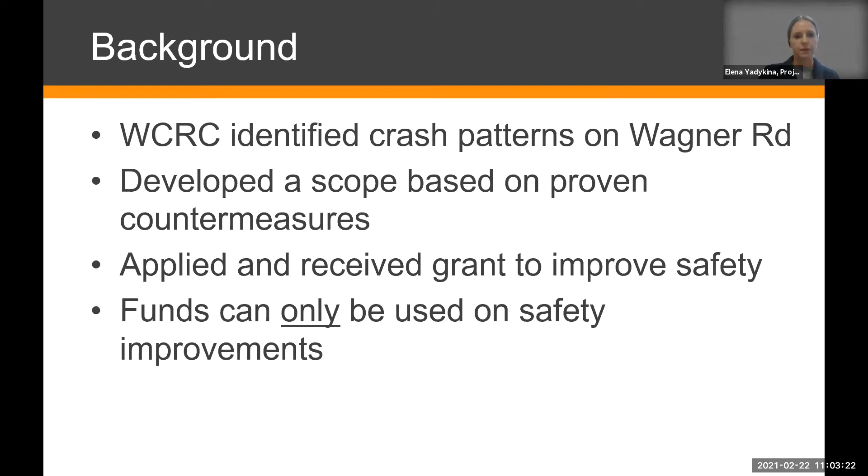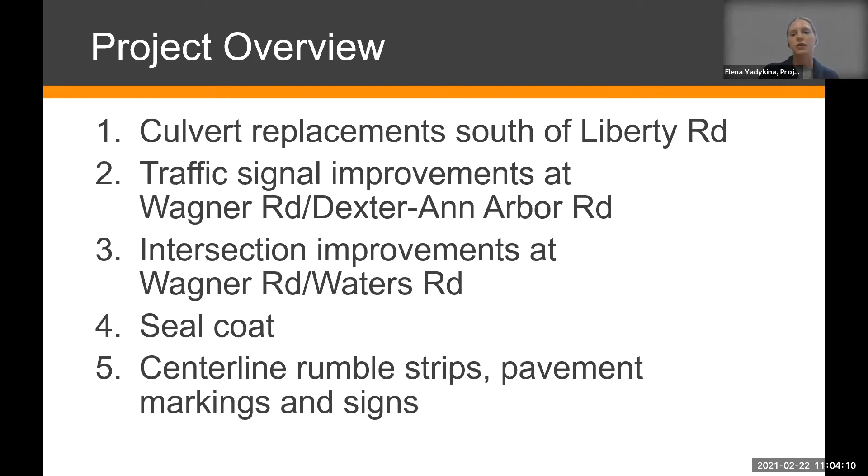We'll talk about the features we included in detail, but the project includes culvert replacements south of Liberty Road, and we listed them based on the timeline, how this will occur, how the project will progress. Then we will improve the traffic signal at the Wagner Road and Dexter Ann Arbor intersection. Then we will work at the intersection of Waters Road at Wagner Road. Then there will be some seal coat improvements and work on this corridor, and we will finish with centerline rumble strips, pavement markings, and signs upgrades along the whole corridor.

And here's the culvert replacements, I think Aaron will talk about that. Thank you, Elena. Again, as Emily indicated at the beginning of the meeting, my name is Aaron Berkholz. I'm a senior project manager here at the Road Commission, and I'll be working with Elena and with our contractor, Fonson, on this project. I'm going to cover the culvert replacement portion, that scope part of this project.

It includes the replacement of 2 crossroad culverts. Both of the existing culverts were identified for replacement based on their condition, and this was a convenient time to replace these, and it provided a financial basis, a funding source for us to replace these 2 culverts. One culvert is located north of, and I'll use the term, the Big Red Barn.

Several of you, as you travel Wagner Road north of Scio Church Road, might be familiar with that. If you're northbound on Wagner Road and go down the hill from the big red barn, that's the first culvert location, the first replacement. The second one is further north, closer to the Cadillac asphalt plant, just south of the southernmost gate into Cadillac's facility.

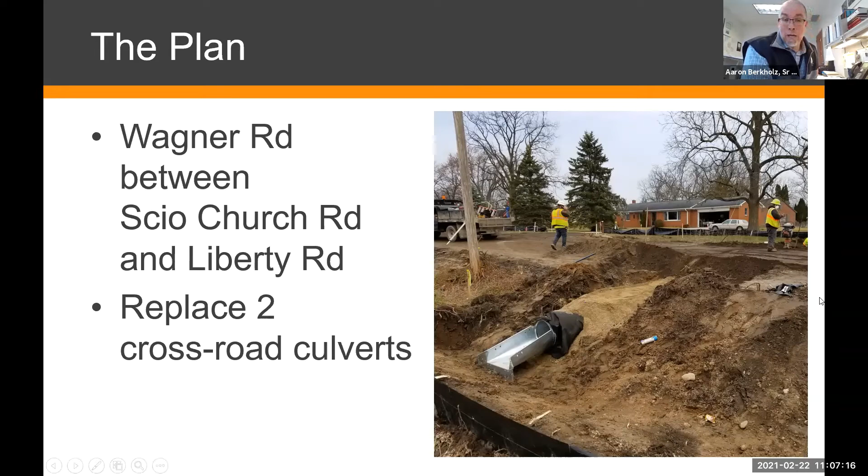The two culvert replacements aren't particularly deep - the existing culverts are approximately 5 feet down from the road surface. Those two culverts will be removed and replaced. The safest and most efficient way to do that is to close the road. Both culvert locations are between Scio Church Road to the south and Liberty Road to the north.

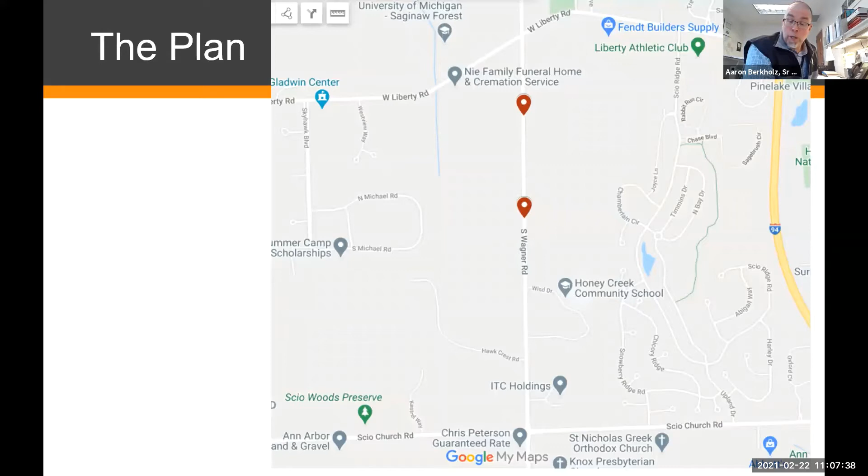In order for us to do this work safely and efficiently, we've empowered Fonson to close the road. The closure is expected to start in June, based on the most recent schedule the contractor has provided us. They expect it to be a 4-week closure to replace both of the culverts that have been identified.

The closure is intended to protect the health, safety, and welfare of the traveling public and the road workers themselves. Something we struggled with a number of times last season was motorists, bicyclists, and pedestrians disregarding road closures. Whenever we implement a planned road closure, there's significant notice provided to the public. The Road Commission understands the impact on the public and wants to make sure people are informed. We go to great lengths to inform people - putting up electronic changeable message signs ahead of the closure, which will be done on this project, as well as advanced static signage. Unfortunately, despite all those efforts, we still have motorists, pedestrians, and bicyclists disregarding that direction.

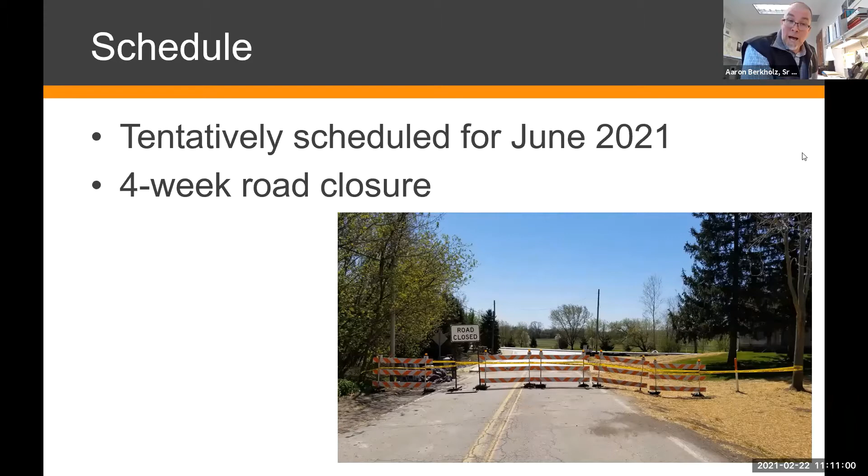What we've done since last season, trying to protect those within the work zones and the traveling public, is put up more barricades. We're trying to well secure the project work zone from those motorists who decide to disregard the signage and barricades. The detour will be signed and posted, following Liberty Road, Zeeb Road, and Scio Church Road. That's a fairly straightforward detour. When we detour traffic off a hard surface, paved road like Wagner Road, we sign a paved detour.

And this is the most straightforward hard surface detour that's available for this closure of Wagner Road.

We are in the process of moving forward with a number of infrastructure investments, road projects for this coming season, and we've been coordinating internally to try to avoid, as much as possible, overlapping these various road projects in the area. Something I find helpful, as a road commission employee, and I think the public can gain from, is looking on the road commission website. Go to wcroads.org, and at the top there's a tab called Road Work and Construction. Hover over that tab and you'll see Current Projects as one of the drop downs. Selecting Current Projects takes you to a very helpful Current Projects roadmap.

You can zoom in and select various road projects that provide information not only on this project, the Wagner Road Safety Project, but also a number of other projects in the area. That includes the reconstruction of the intersection at Zeeb and Liberty, where we intend to build a roundabout, planned for late summer of this year.

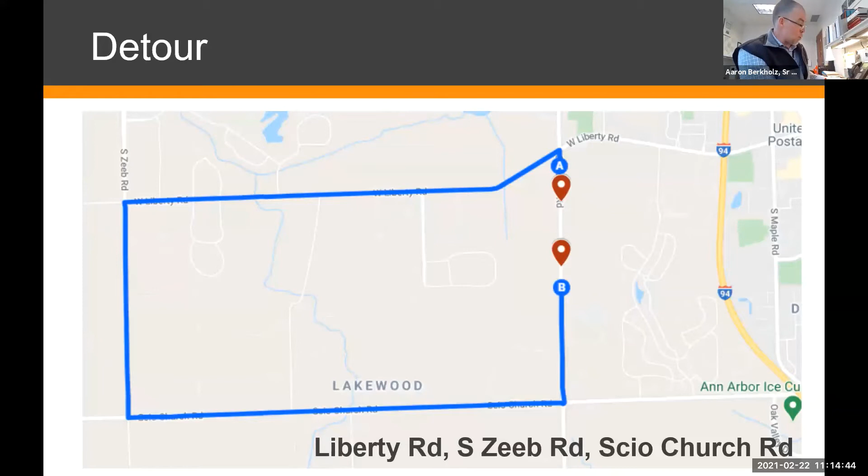And with that being said, I'll go ahead and turn this back over to Elena. She's going to discuss some of the traffic signal investments that we have as part of this project.

Yes, for this safety project, we include upgrades of the existing traffic signal at the Wagner Road and Dexter-Ann Arbor Road intersection. Currently, that traffic signal has a diagonal span with all the traffic signal heads in one span. So the upgrade includes separating out the traffic signal heads for each direction, which is considered a safer setup with better visibility. This is included for this intersection.

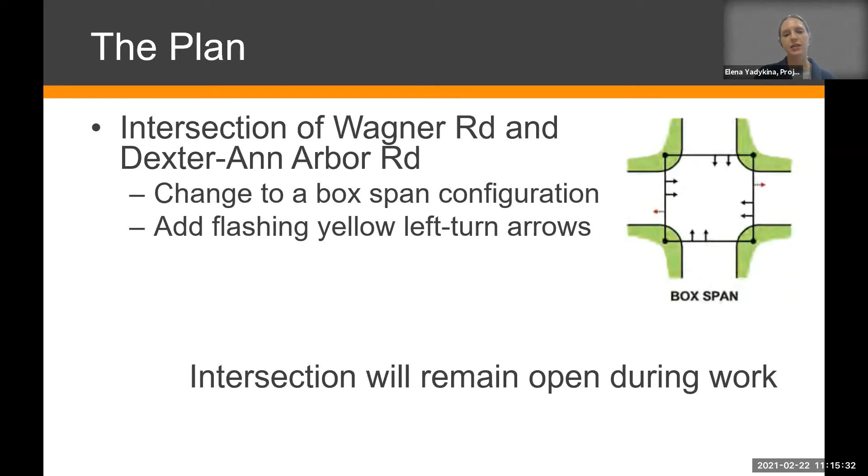It will also include flashing yellow arrows for the left turns on all four legs. This is something you've probably seen in other locations, such as Dexter-Ann Arbor Road at Zeeb Road, where we added that flashing yellow arrow setup. So now you have to wait for a gap, and with the flashing yellow arrow, you can turn if there's a gap, but if there's no gap, you'll wait and get a green arrow to turn safely. This is another feature to improve safety at that intersection.

With the signal upgrade, the intersection will be open. Unfortunately, this time there will be no pedestrian signal, because there are no facilities currently around that intersection to accommodate that. And again, those funds address the signal, and the pavement condition cannot be addressed with this funding. We are just improving safety and addressing the crash history we've seen, because it's a reactive grant.

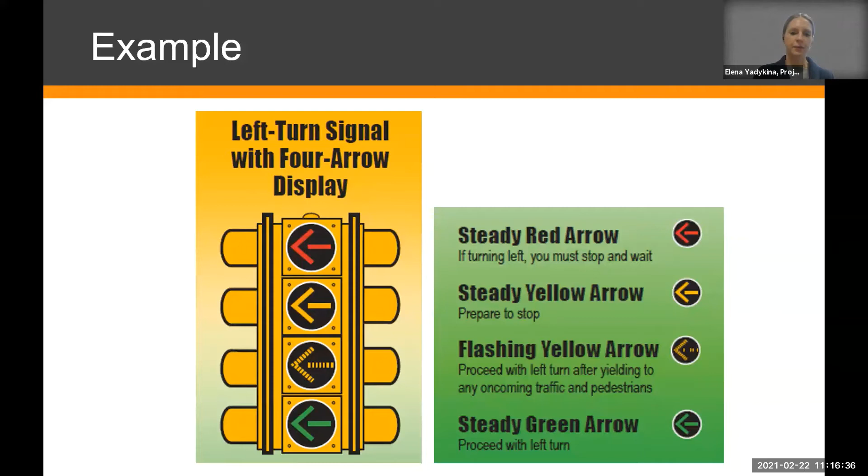Another improvement is at the intersection of Wagner Road and Waters Road. With the high volume and higher speeds at this intersection, the concern was that people turning left off Wagner Road might worry about being rear-ended, since someone might not see them turning. We've seen some drivers taking risks and turning when there wasn't a sufficient gap. To address that, we are going to construct a left turn lane on Wagner Road at Waters, removing those turning vehicles from the through traffic to give them a safe place to wait for a proper gap. We will also install a flashing beacon.

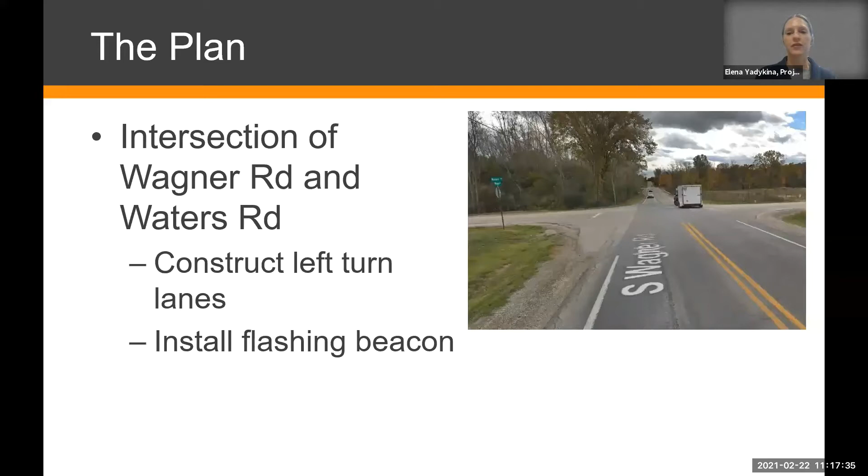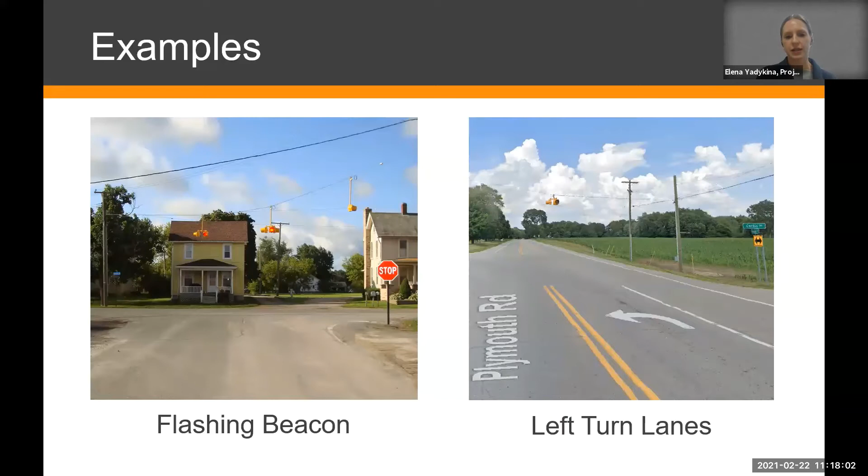We have some examples of these features. The flashing beacon will flash red for Waters Road traffic, as you can see in this picture, because they have a stop sign. It will flash yellow for Wagner Road traffic to warn them that there's a crossing road and there might be traffic entering the intersection. This is an example of the left turn lane as well.

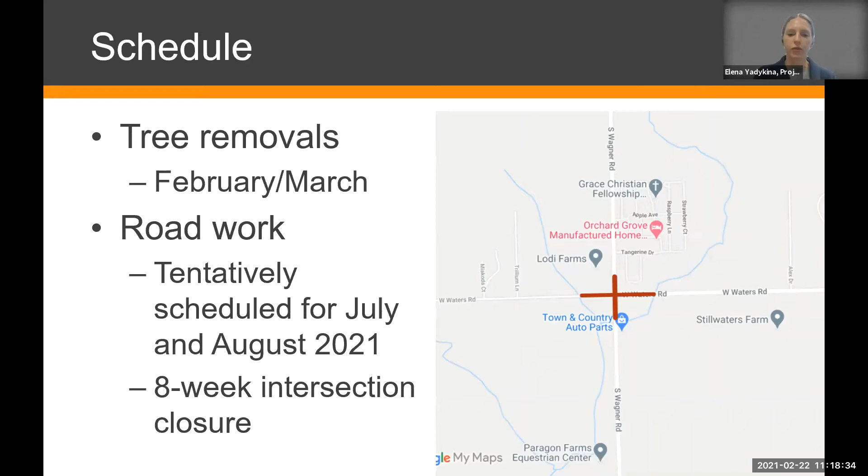For the schedule, tree removals are scheduled to start tomorrow, because of the limitation that trees have to be addressed before the end of March. The construction itself will start in July, and the intersection will be closed for approximately 8 weeks to construct all these features. There will be a detour posted for this work, including Scio Church Road, Oak Valley Drive, Ann Arbor-Saline Road, Ellsworth Road, and Tessmer Road. Hopefully the public will understand and let us construct these features for this intersection.

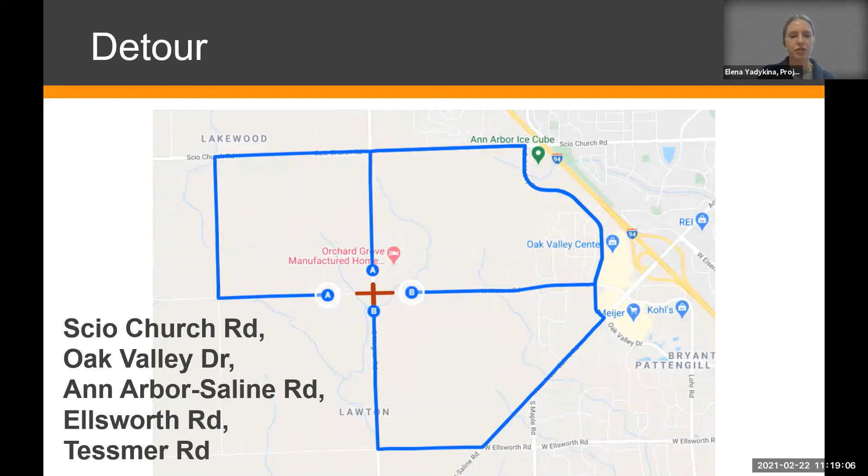I'll talk a little bit about seal coat, another aspect of this overall project. It's not funded as part of the Wagner Road safety improvements, which involves federal funding and bidding through the Michigan Department of Transportation. But as I mentioned, we have a number of infrastructure investments and road projects planned for this upcoming 2021 construction season, including not only projects like Liberty and Zeeb and the Zeeb Road Phase 2 project, but also work to chip seal a number of our county roads, including a significant portion of this segment of Wagner Road.

The extent of that chip seal project is from the Ann Arbor Saline Road intersection north to Liberty Road. We've been working with our operations department staff to discuss the means by which we can accomplish not only the safety improvements on Wagner Road but also that investment in the chip seal. The Road Commission has greatly advanced our investment through the annual chip seal program, and so many thanks to the public for renewing the road millage to allow us to continue that effort to protect and preserve these road investments.

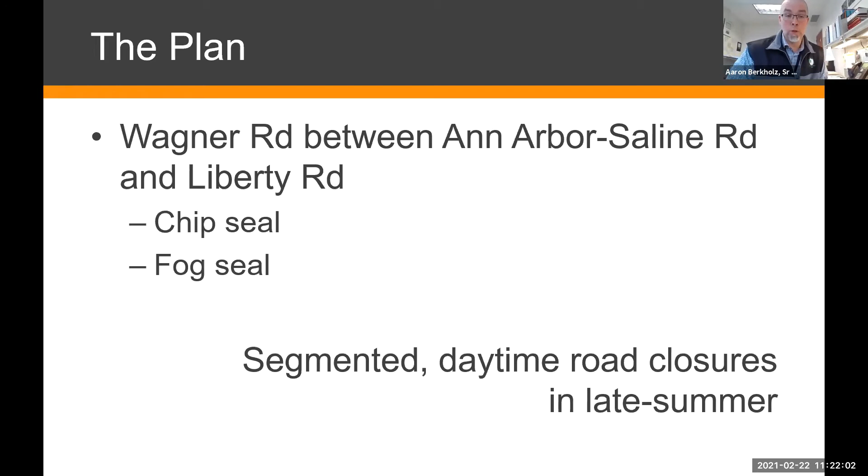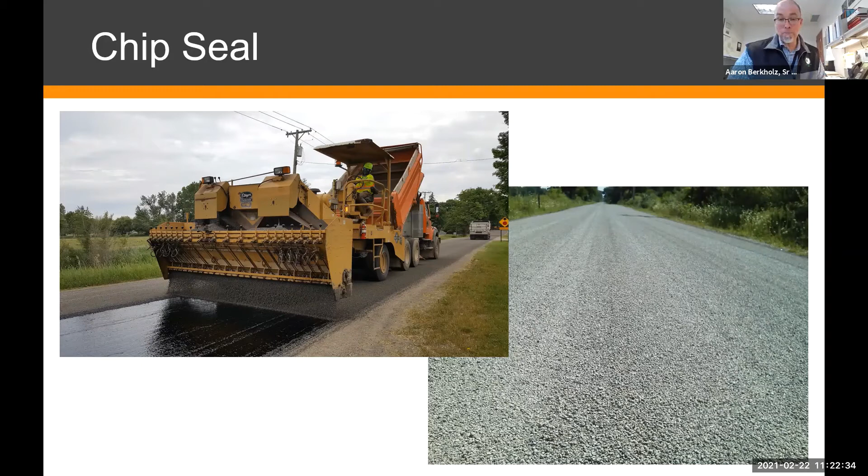We've got a couple of pictures here as examples showing the chip seal and fog seal process. This involves putting down an emulsion, a material that both seals the road surface and provides a material for the chips to adhere to. You can see our operations crew performing that work here. After the chip has been placed, we come back with a fog seal, which serves a couple of purposes: it provides an additional seal to the road, we find better adhesion of the chips that have been placed, and it provides a great surface for us to put down new pavement markings.

That fogged surface being that dark black color really makes those new pavement markings pop. This is a great opportunity for us to enhance the safety of Wagner Road through the MDOT federal aid project that Elena and I have been talking about, but also through this chip seal and fog seal process performed by our operations department.

Just to touch on the schedule related to the Wagner and Waters intersection project, overall we expect Fonson to begin the work this week with the tree removals at Wagner and Waters. We target those trees for removal before the end of March in order to be conscious of migratory bats that may be in the area.

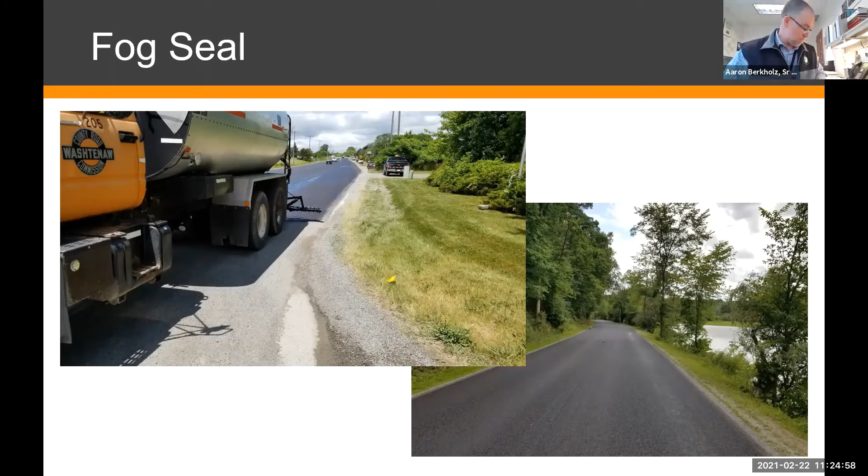Elena will go ahead and touch on some of the miscellaneous work to wrap up today's presentation. Yes, thank you, Aaron.

After these major items of work are completed, we will also be doing center line rumble strips or stripe corrugations. These are to prevent or warn drivers when they are crossing the center line, addressing the pattern we saw. This will be installed on Wagner Road, between Ann Arbor Saline Road and Liberty Road.

Also, throughout the corridor, we will be implementing recessed pavement markings that last longer. Having pavement markings in good condition is important for safety, especially in different weather conditions. And we also will be upgrading signs along the corridor and enhancing some of the signage along the corridor.

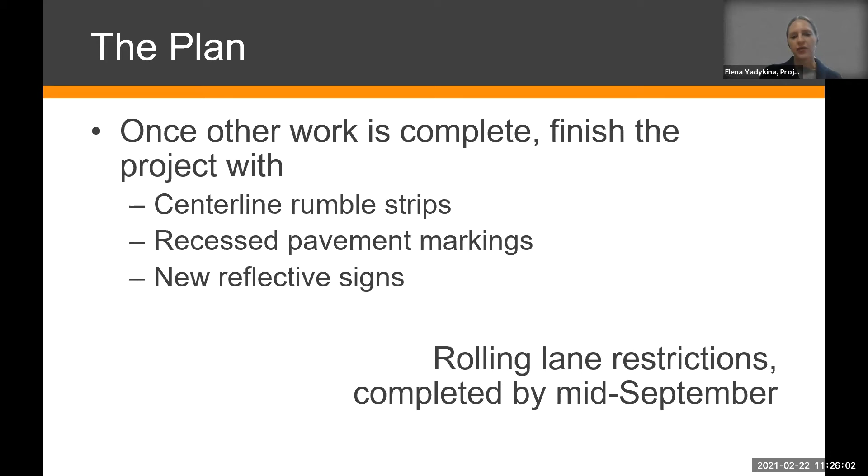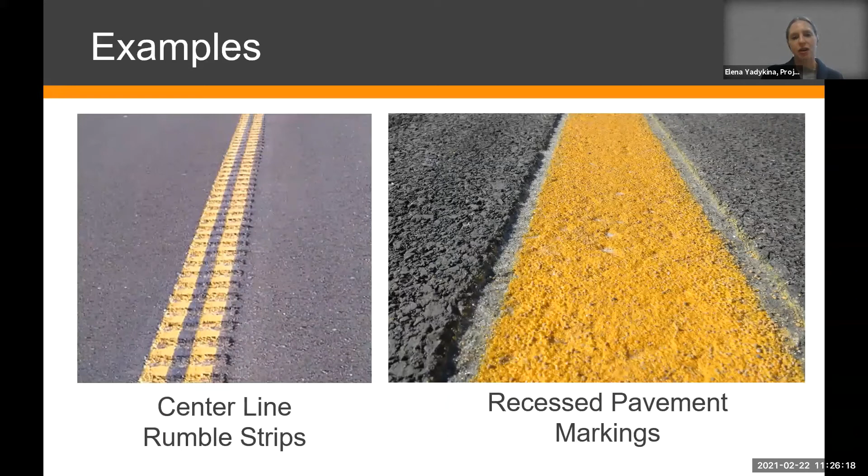We have some examples of the rumble strips here and recessed pavement markings. That's how they look. So both of these are also safety features addressing the patterns we saw on this corridor.

Aaron, I think you will address some of these general construction details, though you already did some of these. Sure. With our experience here working on construction projects, things that are of great interest and importance to the property owners and residents along our corridors are mail delivery and trash pickup.

We do communicate with the post office to make sure that they're informed of our intentions, and that'll be the case this time. We will make every effort to inform the post office of the upcoming closures and where they can access the project limits to be able to continue mail delivery.

Trash pickup, we communicate with the local trash haulers to make sure that they understand they can enter into the closure, into the work zone, in order to collect refuse and recycle.

Interaction as a pedestrian, and I touched on this earlier, what we found particularly last season, and I'll theorize maybe it had to do with the pandemic and people being more at home, is we had much more of a prevalence for pedestrians to want to come to the project site, to walk to the site and stand inside the work zone to see the work going on.

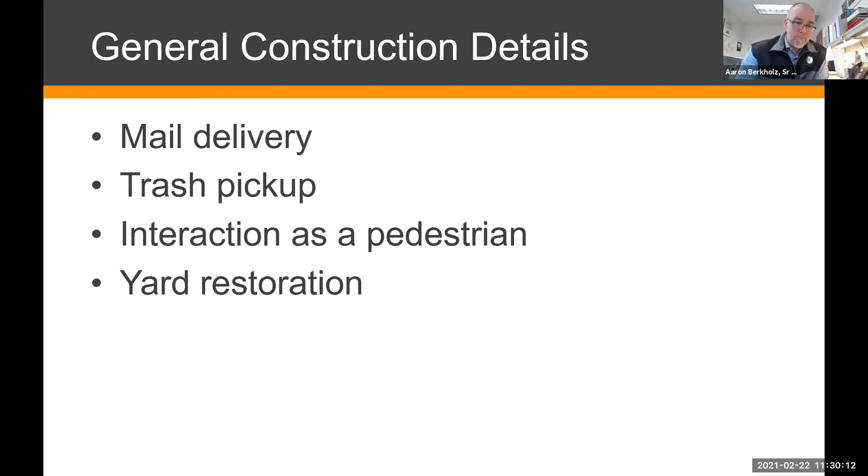So with that, we will go into our Q&A period. I don't see any questions in chat yet, so remember that you can submit a question in chat if you'd rather do it that way.